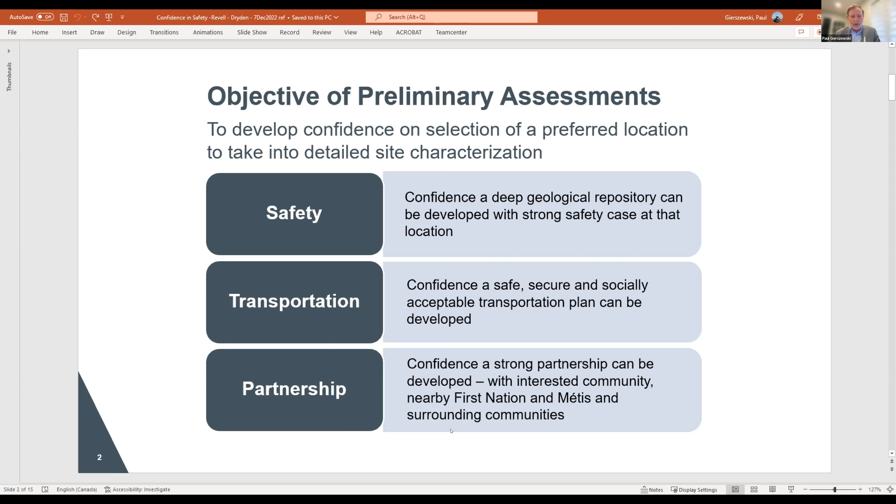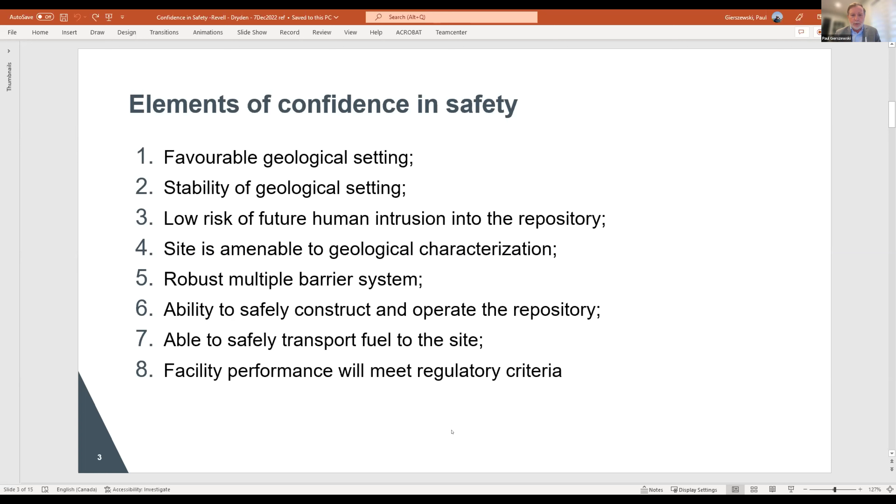As we think broadly about what is it that would give us confidence in safety in a site, it's summarized in these 8 bullets. I'm not going to go through them in detail here. Several of them have actually been things that we've been using for a long time as part of the site selection process. Then there are some additional items brought in here that are really the multiple barrier concept, which is common to any site, but as part of the overall confidence, we bring them all together and how the whole thing performs as a combined system for a particular site. So these are the sorts of things that we've been looking at, and they're described in a bit more detail in the report. I'm just going to highlight some items in this presentation.

But before I do that, I just want to be clear that building confidence is a process. We started on the process—we started doing studies in the Revell site area back in 2012. There've been a number of studies underway there, including 6 deep boreholes to date, plus a variety of other ones.

Some of these analyses are still ongoing. There, for example, a variety of rock cores that were put into various laboratories. Some of those analyses will take years—they're still underway, and there's a lot more analyses that we're still planning to do. This schematic here is just to illustrate that point: what we're describing right now is our confidence based on what we've seen to date, and our confidence in our ability to proceed with this site.

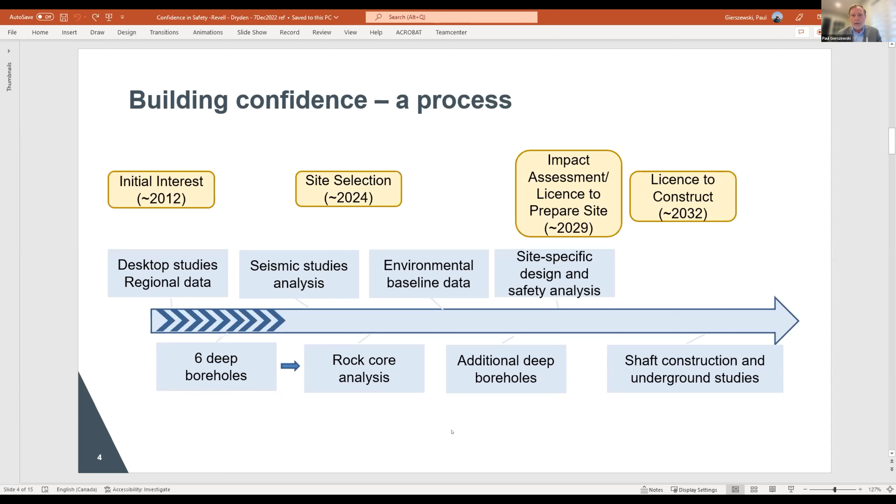We're not saying we have enough information yet to support a license basis decision, but there is a decision that we are collectively making as to whether we proceed with this site, and do we have enough confidence that it's worth making that next step. So when we talk about confidence, we're talking about that point in the process.

I'd also say that at this point, much of our confidence is built on the multiple barrier approach. You've seen that presented in a variety of ways. This is an internationally accepted approach for management of used fuel, and other countries are following a similar approach. But what's different now is that we have evidence of the suitability of the rock at the Revell site from our recent studies. That understanding is summarized in a confidence in safety report that we released in June of this year.

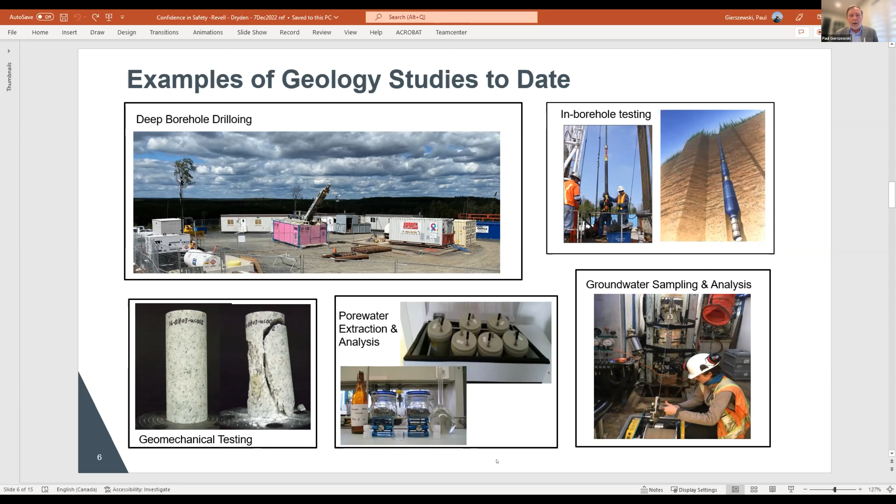Just a little visual here. This is a picture of a variety of tests, measurements, and studies on the geology that are underway or have been done, starting from the borehole, and a little bit more visual testing at the site in the top right picture, to a variety of other tests, some of which are done in laboratories. The bottom two, for example, look at the properties of the rock and the properties of the pore water and the chemistry. Just to give you a sense that there's a lot more that happens other than the things you see at the site itself.

So what do we learn from these things? Let's start with the big picture. The Revell site itself is within the Canadian Shield, and that's the oldest rock in North America. The figure on the right is colored by the different types or groups of rocks within North America. The red portion is the Canadian Shield, and that is the oldest rock in North America. It's around 3 billion years old.

Now, the site that we're looking at is within a batholith, which is a rock formed from magma that intruded into the shield. It's about 2.7 billion years old. So it's part of this larger Canadian Shield, but a portion within it.

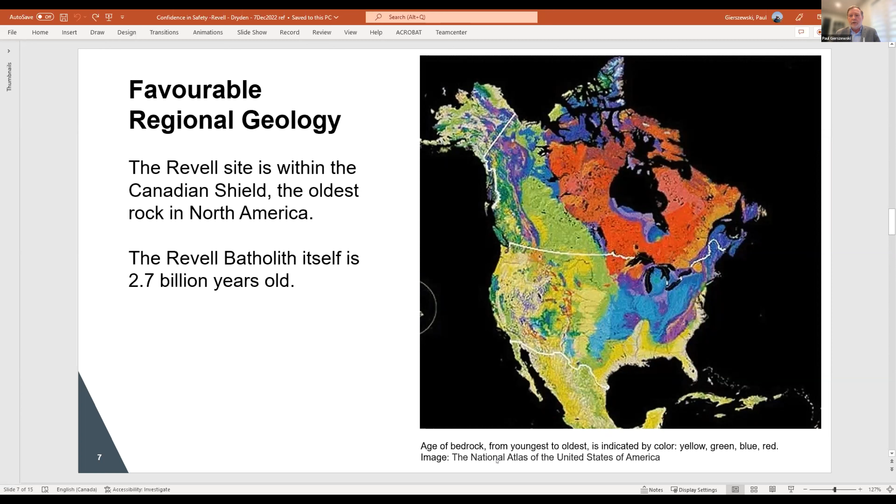What we also found from the drilling is that the rock itself is favorable at the site. Most of the rock core that we found during the drilling was a type of granite referred to as granodiorite tonalite, about 95%. That homogeneity is very helpful for us, and it's a good sign for the characteristics of the rock. Now, this rock type is suitable for hosting a repository.

Another important aspect is water, and we look at the water in the rock for the story that it tells us. We were only able to collect water samples at 6 fracture locations at depth in the 6 kilometers of core that we've drilled so far. So that's an indication of the low water content.

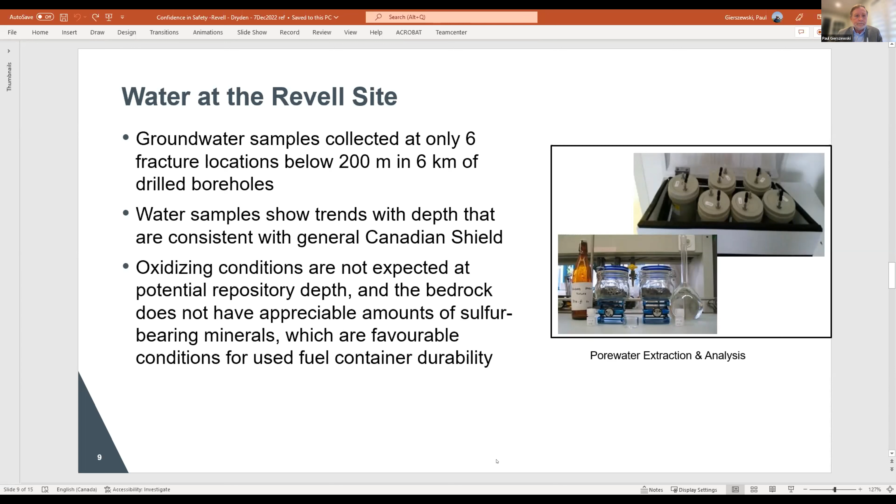Now, there is more site characterization required, and if the site is selected, we plan to do these. But we feel that based on the amount of information we've seen so far, what we're seeing in the rock, the uncertainties are less about whether the site itself is suitable, and more about developing that quantitative understanding of the site that we would need to support the detailed engineering and the license application.

At the Revell site, one area that requires more work is the shape and the properties of the fractures in the subsurface. We plan to address this through further site characterization, but also the design of the repository is such that we have the ability to optimize the layout of the emplacement rooms during underground excavation. As we're drilling and excavating into the rock, we can make adjustments based on what we find.

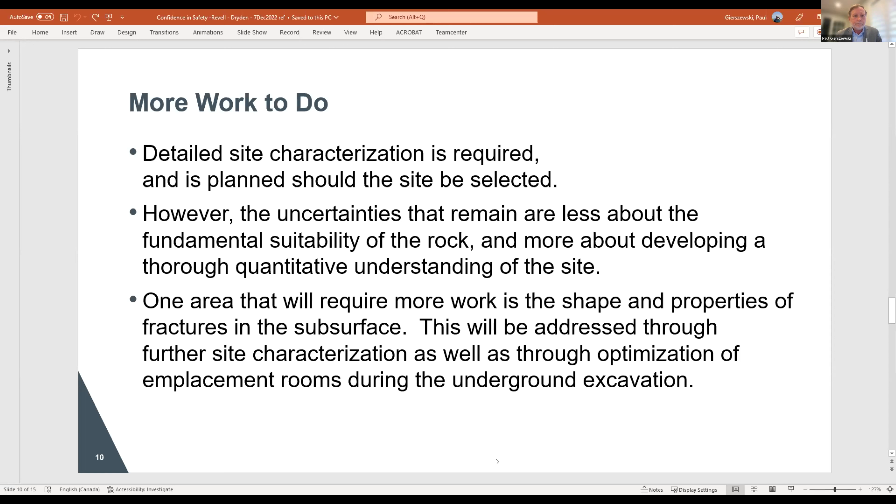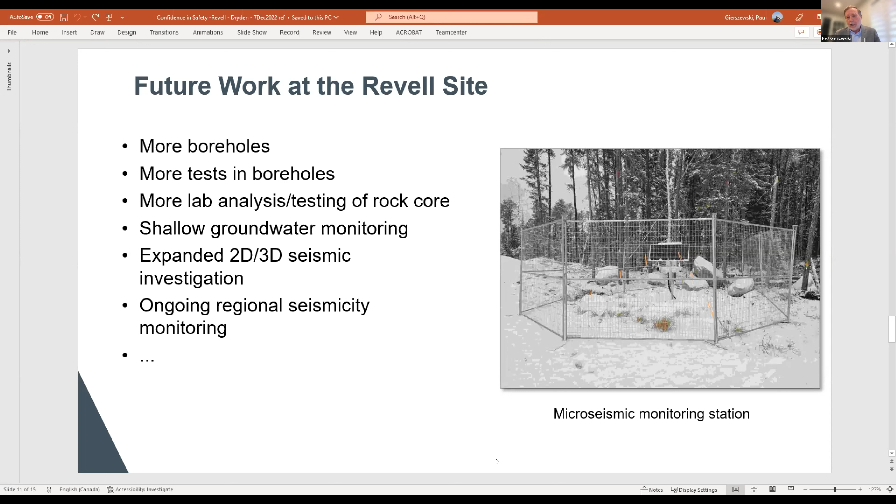A slide that just briefly talks about some of the future work we would do at the site. Essentially, it's more of the same. We would need to drill more boreholes, there'd be more tests in the boreholes, and a lot more rock core would go out for laboratory analyses. We have underway right now groundwater monitoring and regional seismic monitoring. There'd probably be additional seismic tests within the boreholes themselves, and a variety of other tests and studies, not just on the geology, but regional information and environmental baseline. A variety of studies would continue as part of the future work.

So the conclusion, very briefly, is that based on the assessment results to date, we're confident that a deep geologic repository could be constructed at the Revell site in a manner that would provide safe long-term management for Canada's used nuclear fuel. As said, there's more work to be done, but the information and the basis for our confidence to date is summarized in that technical report that was made public in June and is available on our website.

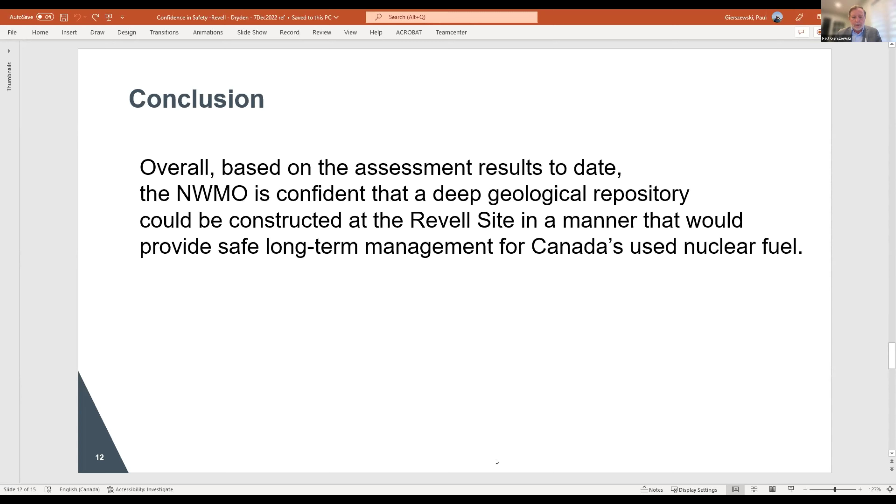That's a very brief summary. I'd be happy to take questions now, or turn it over to Colleen and see if we want to go through the rest of the presentations and then take questions at the end.

Thank you, Paul. I think we'll continue on and then do questions at the very end. I think that would work. So I'm not sure who's next to present. Would that be Nick or Matthew? That's right, Nick? Yes. So I could turn it over to Nick. And Nick, if you... oh, he's on it.

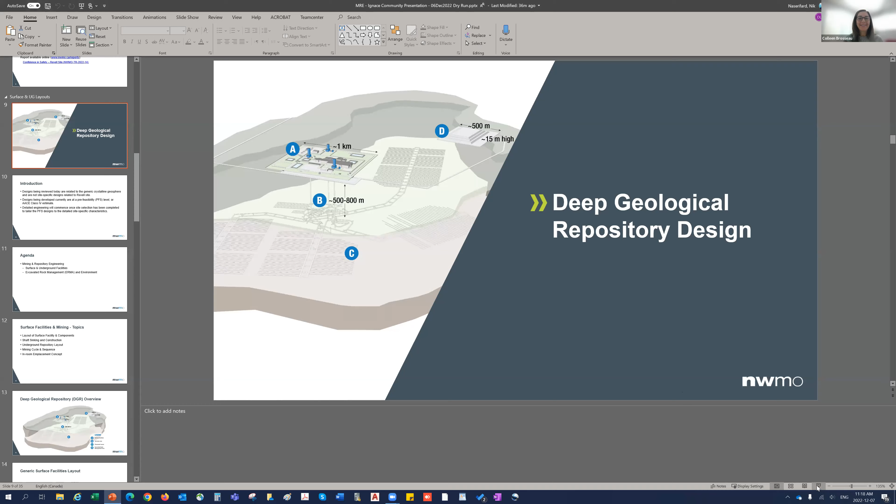Okay, thank you, Paul. Deep geological repository design. A little bit of introduction. So designs are at this time preliminary and related to a generic crystalline geosphere, and are not detailed site-specific Revell designs. These conceptual designs are the same as the 3D model in the Learn More Center. Currently we're working on a pre-feasibility level of engineering designs for Revell. Detailed engineering won't begin until after the site selection process is finished, when we will tailor the pre-feasibility study designs to the detailed site-specific characteristics.

So overview of the items I'll be covering today. For mining and repository engineering, I will cover an overview of the facility and the key component infrastructure, in-room emplacement concept for the engineered barrier system, the DGR development cycle, and my colleague Matthew will discuss the excavated rock management area and environmental controls. More specifically, I'll be covering the surface facility layout, the shaft sinking and construction, the underground repository layout, mining cycle and sequence, and I will finish with the in-room emplacement concept.

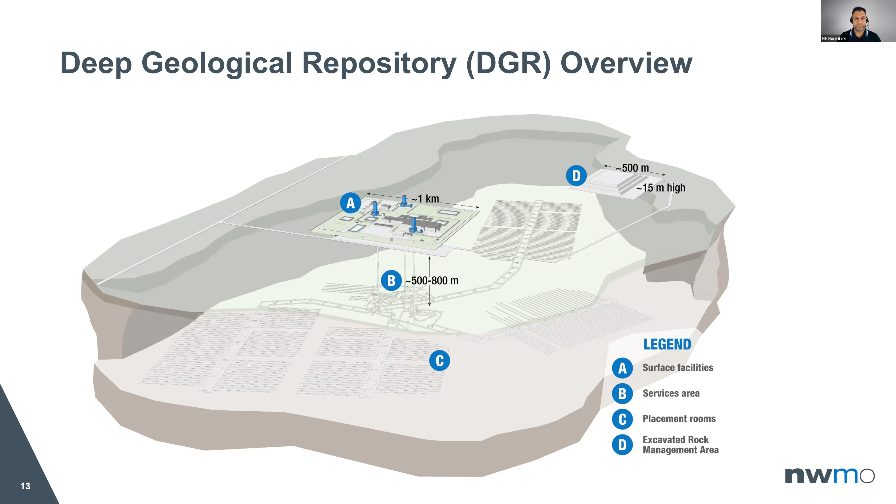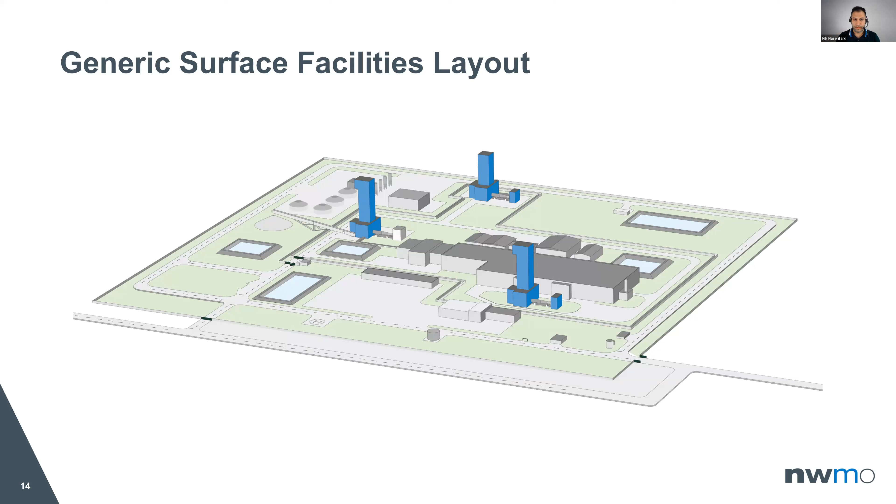So the overview of the surface facilities is shown here for you, and the site is separated into 2 areas, with that separation happening via fencing and access gates into the balance of site and the protected area. So here we discuss the balance of site facilities. The balance of site area considers general non-nuclear surface facilities required to support staff and operations, including the perimeter fence encircling the full surface facilities footprint, and a sealing material compaction plant, where the compacted bentonite buffer boxes and spacer blocks will be fabricated.

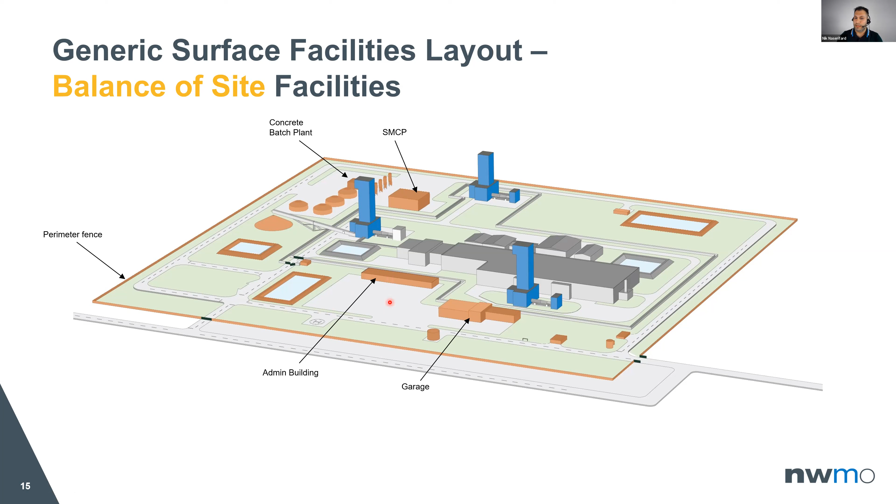Here we have a concrete batch plant, where concrete and shotcrete used for construction and ground support will be made. Some water management areas for stormwater and service water, as well as water treatment and pumping facilities. Then here we have the admin building. I'll try to show with the laser pen here. So here, this is the admin building, and this area here is garage and warehouse, and this area here is for parking. It's a parking area, basically.

So the second portion of the site, the protected area shown in green here, basically includes a secured area with controlled access and double security fence. It includes all nuclear related facilities and underground access points, which is comprised of the used fuel packaging plant and supporting facilities, quality control and quality assurance, and also all 3 shaft complexes. It also includes the protected area water management pond, as you see here.

Okay, so you might ask how the used fuel handling on site will be like. So basically, initially the trucks enter the site through balance of site and protected area security gates and access and fences. And then the used fuel transportation package is received at the used fuel packaging plant, shown in the protected area here.

Then the used fuel is removed from transportation packages and is placed into the used fuel containers. Then highly compacted bentonite buffer boxes are fabricated at the sealing material compaction plant and are then delivered to the used fuel packaging plant. Then those used fuel containers are loaded into highly compacted buffer boxes and are placed into a shielded transfer cask.

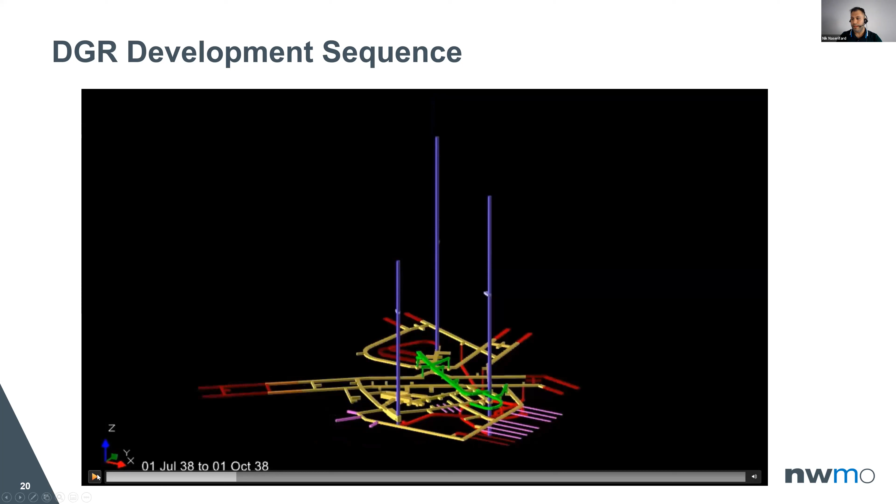As the fourth step, the access tunnels for each arm, as well as the first and last placement rooms in each panel to assist with geoscience verification activities, will occur. Once the first full panel is developed, the transition to operations with placement activities and development of placement rooms in a separate placement arm will occur concurrently.

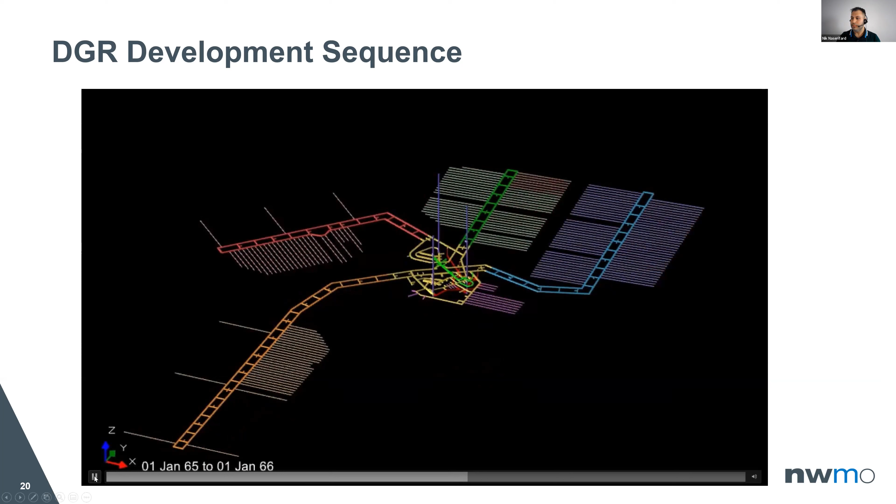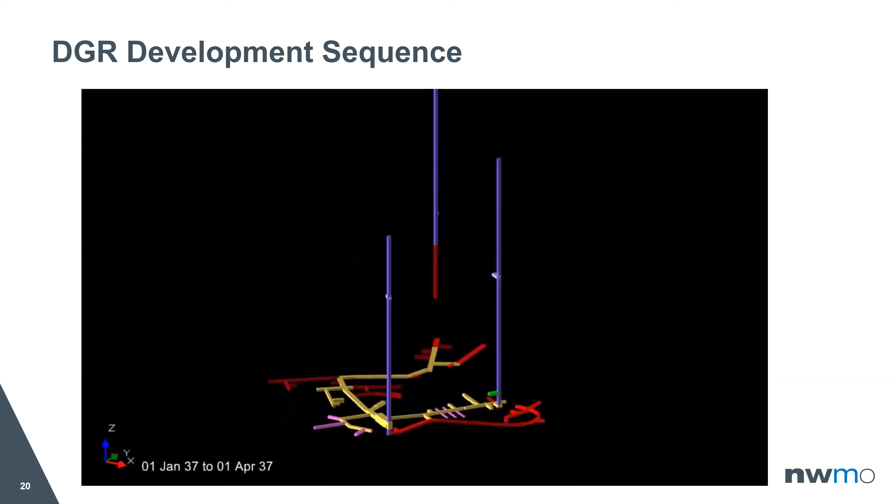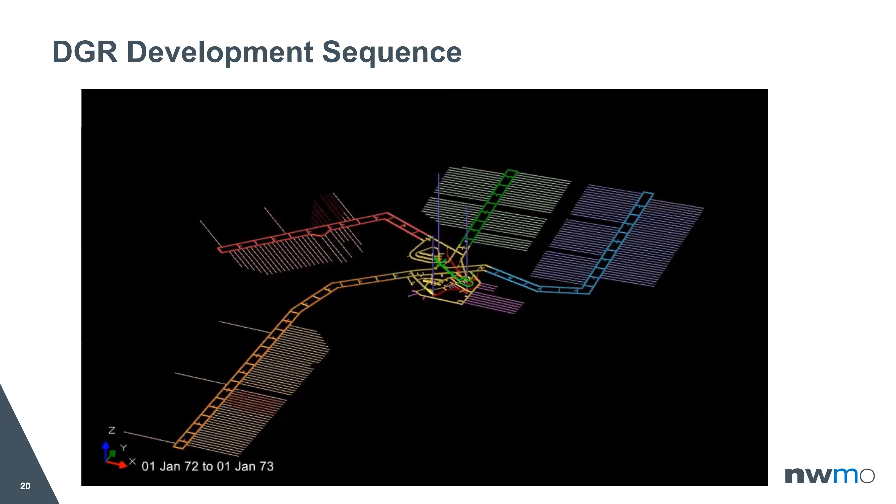Yeah, sure. I'm not sure, Colleen, if you want to take that to the end, just to be consistent with all the questions. We can answer that at the end if you'd like. Okay, fine, let me just go back. Just to keep you aware. Okay, sure, good to know. I'll continue and then we will for sure address all the questions at the end.

So basically, as you see in the video, that's step number 4. Step number 5 is, once placement is complete, a 70-year extended monitoring period followed by decommissioning and closure will occur. So what do we mean by placement activities? What does the emplacement look like? As you see in the visual here, you can see the emplacement concept.

Let me get the laser again. These are the highly compacted buffer boxes loaded with the used fuel container. The dark grayish ones are the spacer blocks, also using highly compacted bentonite material. And the material encircling the buffer boxes is the gap fill material.

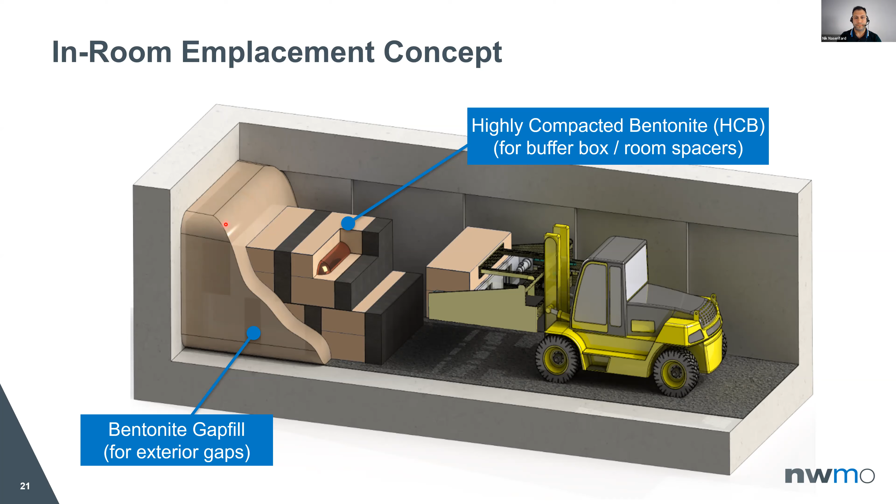The placement rooms are quite narrow. As you see here, they're 2.4 meters high, 3.2 meters wide, but rather long, around 300 meters in total length. Once the first full panel of placement rooms is excavated, placement activities can begin, including loading the buffer boxes and spacer blocks placed in a staggered pattern. Then the gap fill material placed around the compacted boxes will be the step after.

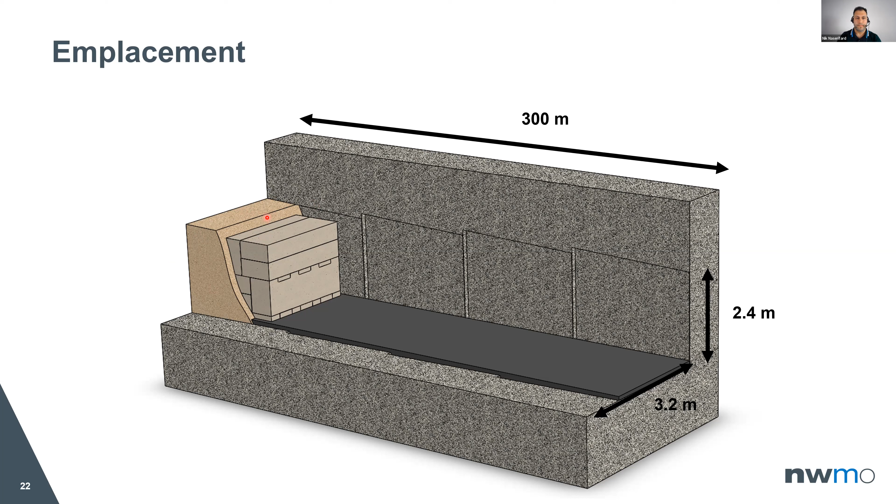The cycle is repeated until the room is completely full, and the placement room seal is constructed afterwards. Earlier this year, a proof testing program was completed at the NWMO Oakville facility, focusing on the production of used fuel containers, bentonite buffer boxes, and placement and compaction of the gap fill material around the buffer boxes in the mock emplacement rooms. So some photos from the facility, starting in a clockwise direction from top left.

That's the bentonite buffer boxes with some gap fill material placed around the perimeter. This picture is a vacuum lift for the floor blocks. This one here is placement equipment carrying a bentonite buffer box. This one is gap fill placement and compaction equipment in the mock placement room. And the last one is the outer view of the mock placement room.

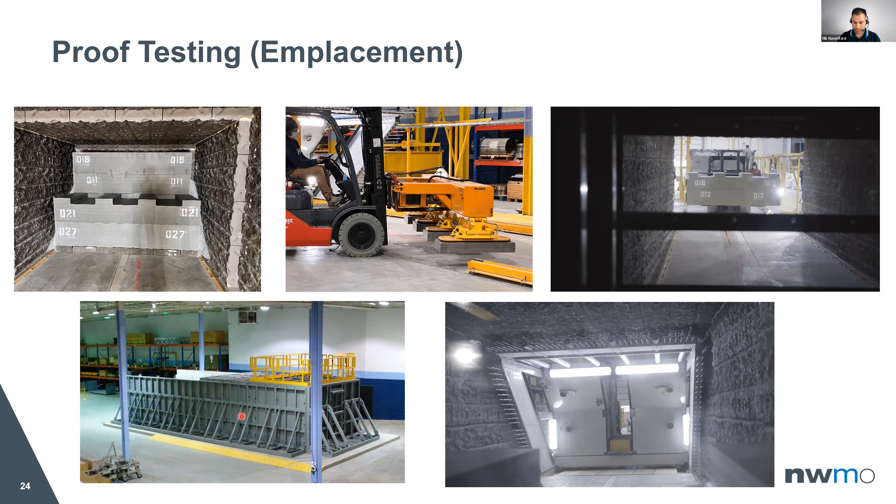So in summary, basically we touched on an overview of the surface facilities and used fuel life cycle management from receipt on site to underground emplacement. We also talked about shaft sinking with water management techniques and technologies. And we also touched on underground lateral development sequences and phases over the life cycle of the repository.

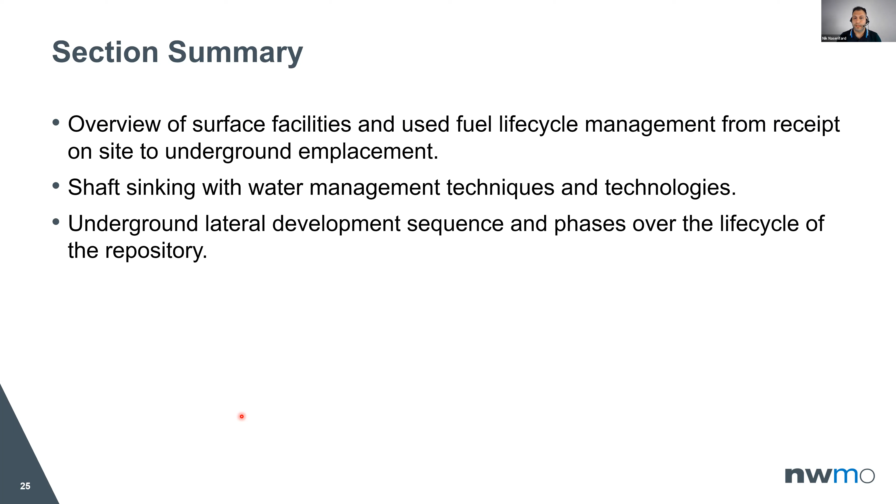So yeah, that's it for me. I'll now hand it off to my colleague Matthew for the next section. Thanks, Nick.

So I will be talking today about our plan for the excavated rock management area. So that consists of the construction and the reclamation, some ongoing work around best management practices for mitigating some of the impacts from construction and operations, and then just an overview of our site water management concept. Next slide.

So the excavated rock management area will be required to store the broken rock that's excavated from the deep geological repository during construction and operations. So currently we're looking at about a 500 meter by 500 meter pad size and a total stockpile height of 15 meters. That'll be constructed in three 5-meter lifts. So preparation for that will be leveling and grading the pad area and then installing an impermeable liner below for runoff management. Then the excavated rock will be transported from the service shaft to the excavated rock management area where it'll be deposited and then shaped with bulldozers.

In addition to the construction, we're also planning some water management around the footprint. So we'll have perimeter ditches that'll direct any stormwater runoff to a dedicated stormwater management pond. And then the impermeable liner below will also assist with managing the runoff.

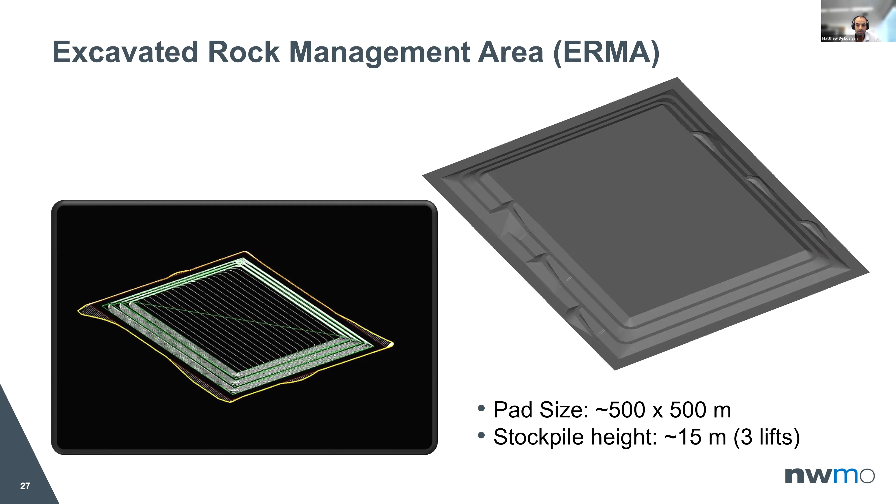Next slide. So reclamation of the excavated rock management area. So reclamation objectives generally are to protect public health and safety in the long term, alleviate, mitigate, or eliminate environmental damage or impacts associated with the construction, and then to return the land to its original condition or as close as possible or an acceptable alternative.

So some of the things that we'll be considering for rehabilitation and reclamation of the excavated rock management area include restoring the surface by revegetating and hydroseeding with plant species that are similar to the area and what was in the area prior to construction. And then the goal is really to ensure that the surface vegetation is capable of supporting itself in a self-sustaining ecosystem over the very long term.

So our detailed closure plan will be developed at later stages. We're doing some ongoing chemical analysis of the rock just to make sure that we are designing all of the appropriate and adequate measures in place to manage any of the stormwater runoff. Next slide.

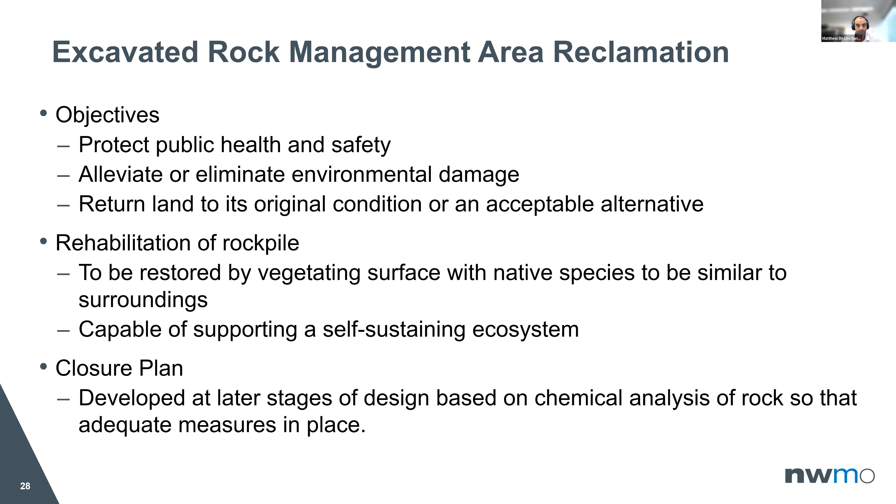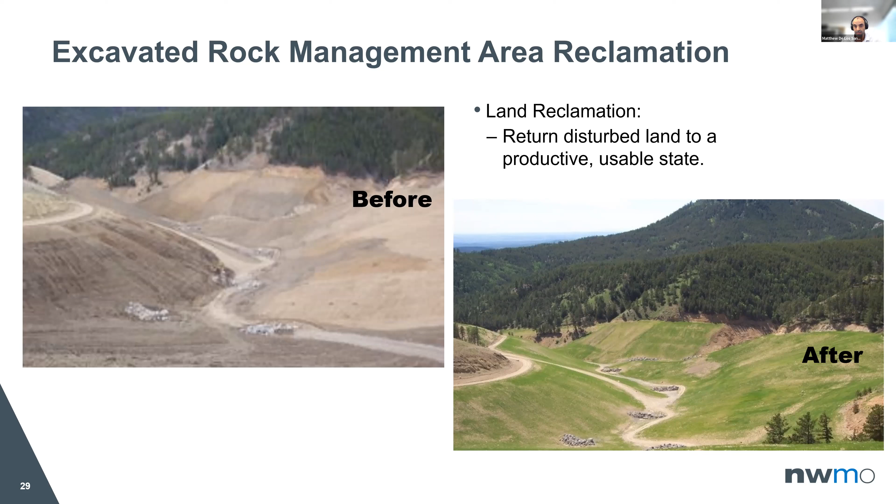So just an example of pre and post reclamation. So this is after construction, revegetating and hydroseeding. In our case, for the Revell site, we'd also be looking at planting trees that are similar to the nearby surroundings. So that's one distinction to the image in the bottom right. Next slide.

So in terms of best management practices during construction and operations, we're looking at operational controls primarily, and then some other engineering considerations to try and mitigate some of the impacts. So principally noise and vibration, dust control, and visual impacts.

So as Paul mentioned, where we're putting the deep geological repository has favorable chemical composition. There's low groundwater movement, and it's also capable of resisting changes from earthquakes and ice ages. So it's part of what's guiding the repository depth. Next slide.

And in terms of site water management, we're considering currently that there will be inflow from three primary sources. So there will be raw water that's sourced as makeup water for use in the streams. We'll have stormwater or rainwater that's collected on site.

And then although we are expecting minimal water inflows from the DGR or from the repository horizon, as Paul mentioned, we will be designing in the capacity to deal with any water inflows and then recycling that water as much as possible for reuse in the underground service water stream. So once this water is collected from all three of these sources, it'll be monitored and treated as required for use in our different streams. So we have surface water that's used for facilities and operations, both on surface and underground.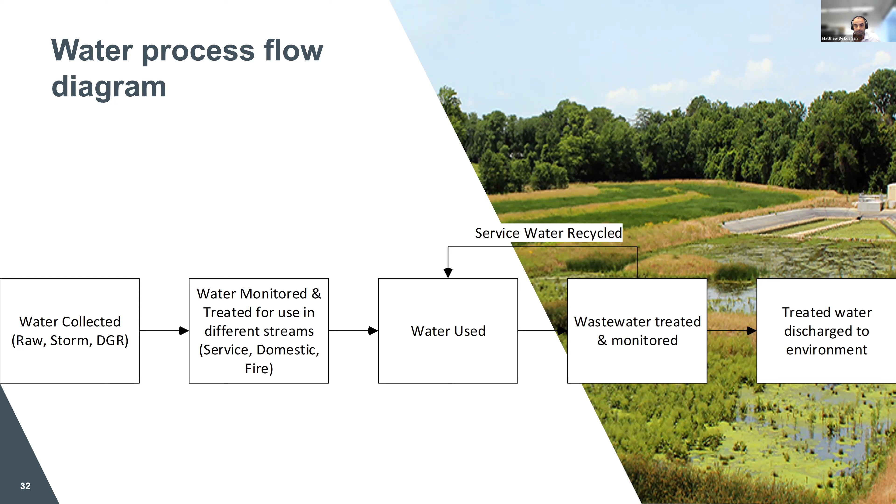In addition to these, as Nick mentioned, we'll be looking at shaft liner designs and water control methods for the shaft sinking and construction and long-term water management. And all of our systems on site will have built-in redundancy to ensure fail-safe. So that's pumps, filters, piping, treatment plants, etc., and monitoring. Next slide.

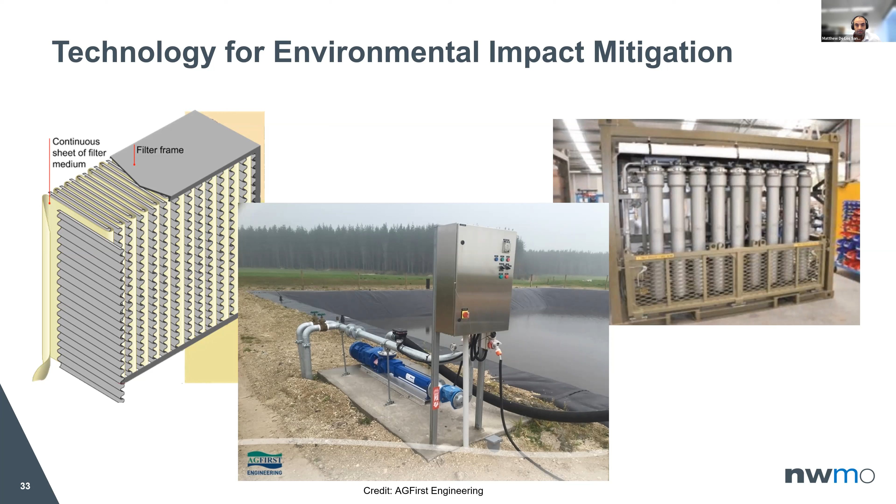So in summary, I breezed through that one a little quickly, but we discussed the excavated rock management area, construction, and reclamation, and that'll be used to store all of the excess rock that's excavated from the underground repository. We'll be reclaiming it with plant species that are aesthetically similar and similar species to the surroundings, and ensuring that it's capable of self-sustaining that ecosystem in the long term.

And then our site water systems, which we're currently designing, are being designed to recycle water where possible, and ensuring that we're treating and monitoring any water that's flowing from the site and ensuring that we're meeting regulatory requirements. Next slide. And that's it for me. So I guess it's just time for questions now. Thanks.

Okay, great. So we have some questions in the Q&A, and I've marked them as ones we'd like to answer live here. So I'm gonna jump back to Nick really quick on Bernane's question. So Nick, can you see the question in the Q&A box? Sorry, you're on mute there, bud. Okay, so the first one here, 11:30 a.m. Yep. Okay, sure.

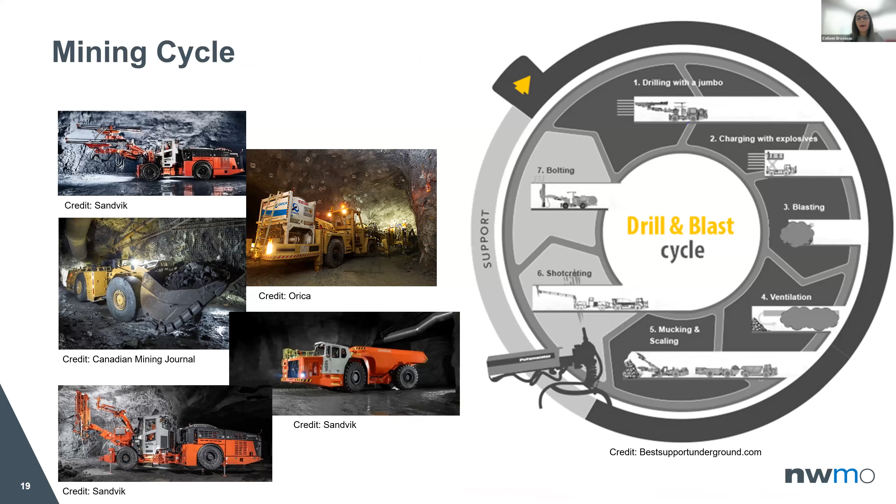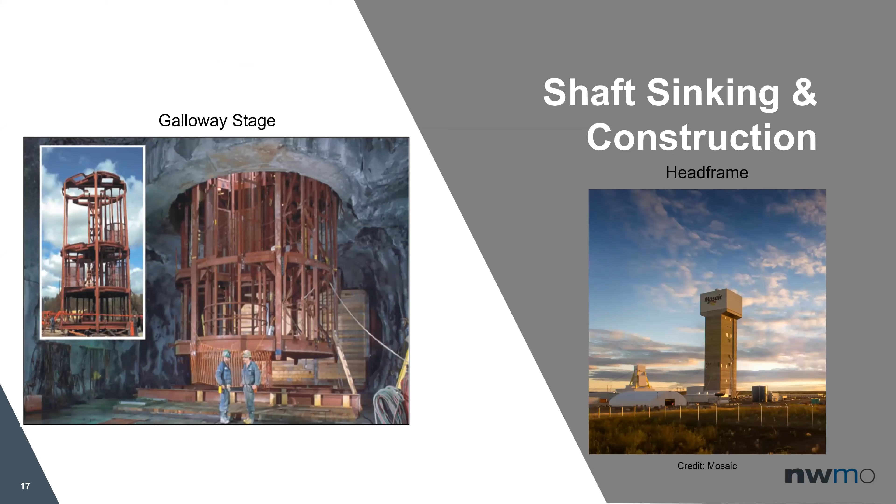Yeah. So Bernane asks, Nick mentioned a shielded transfer cask. Is that the same as the UFC/buffer box transfer cask referenced in the September 2021 conceptual design report? So basically, a shielded transfer cask is an equipment that provides shielding for the used fuel container during the transfer from UFPP to the placement room. But for further details, I'll pass it to Matthew for this terminology.

So the shielded transfer cask, UFC buffer box transfer cask, I believe those are the same, yes, as what was described in the conceptual design report.

Next question, does the confidence in safety report integrate findings from all 6 boreholes? And I think we're just referring to, at this point, the Revell site. It does not. It was essentially based on information that was available at the beginning of the year, and we didn't have all those results yet. However, based on the results that we've seen since then, they're still consistent with the story that was presented when that report was written. Thank you.

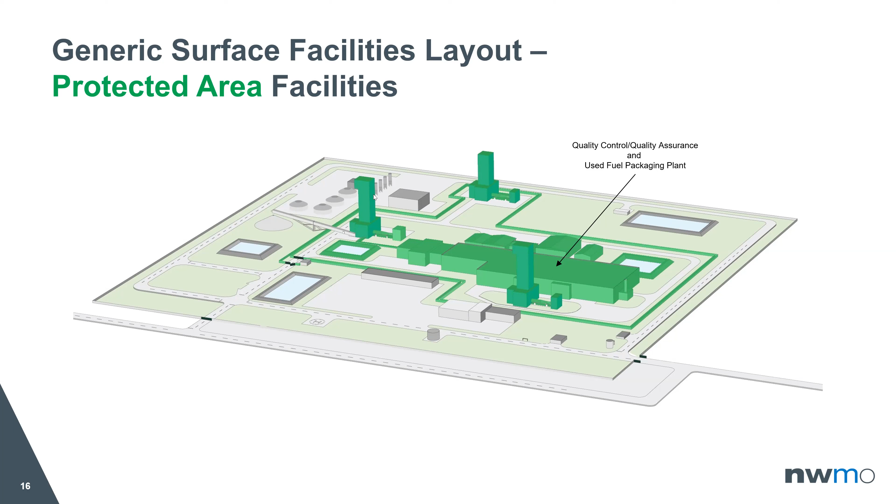Which 3 boreholes will be used to monitor pressure? There's a reference on page 65 in the confidence report. That's a geoscience question. I'm not sure which of the 6 are currently being used to monitor pressure. We'd have to get back to you on that one. Thanks, Paul. If you could do that for us, we'll happily post the answer to the question on the website.

And last question here from Bernane. Where are the results from the 6 boreholes available? I'd just say generally those reports are still in preparation, so they've not been released yet. All right. Yeah, and obviously when they are released, we'll be able to have access to them through the NWMO's website. I'm sure they'd be shared with the community as well, yes. Thank you, Paul.